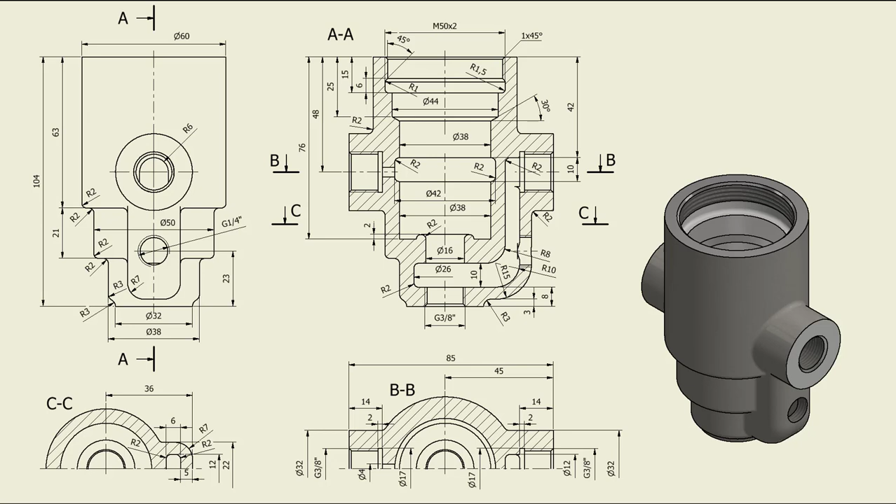Hi my friends, let's model the part number 96 brake regulator body from my collection of 100 parts.

The picture of this body is this, and it has an empty feature here. Let's see the drawing. You see this one, which is difficult because you must observe the other features around, but we can create it, of course. Let's model it.

The first volume is the main body with this contour. Here there is another step, 1, 2, 3, 4 steps. With this distance, this will be the center point at 48. So let's draw the contour.

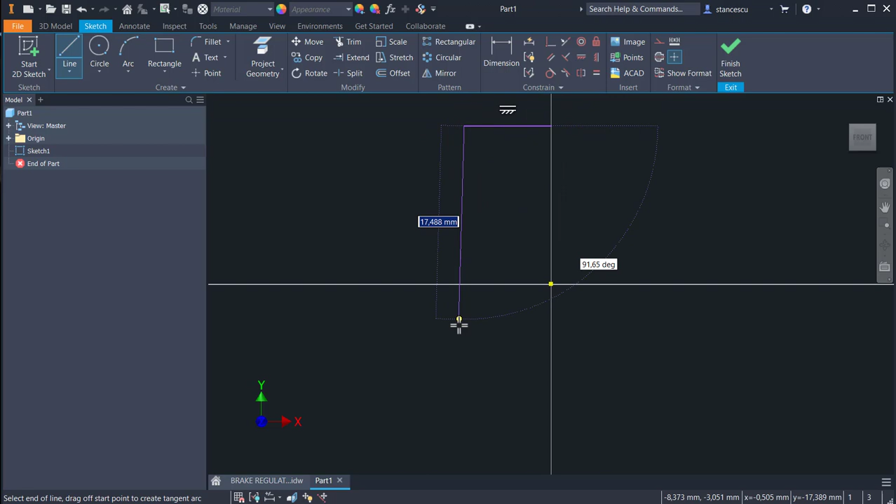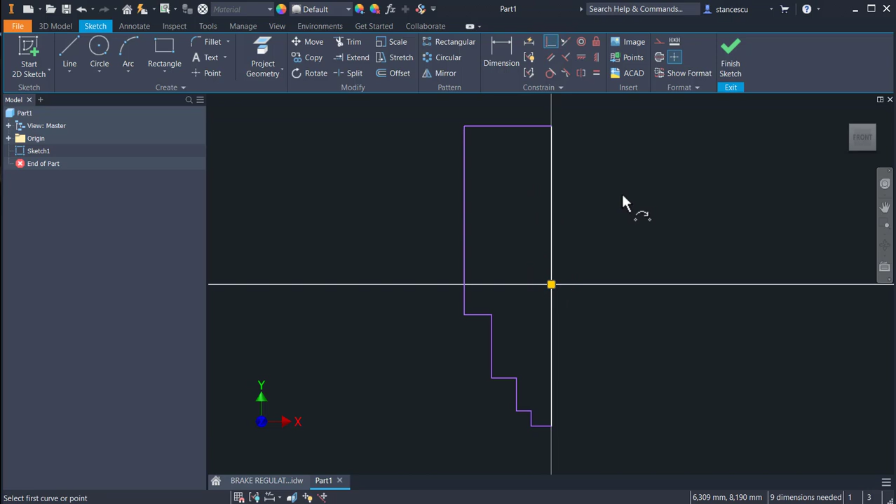This line contains the center point, and it is a center line. The height is 104 millimeters. This distance is 48, as I said. This is 63. You have dimensions in the drawing. 21. And this is 3.

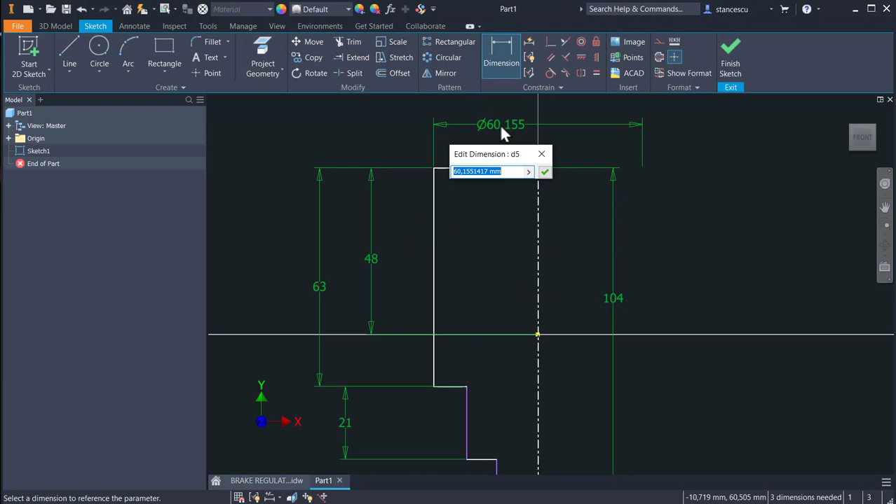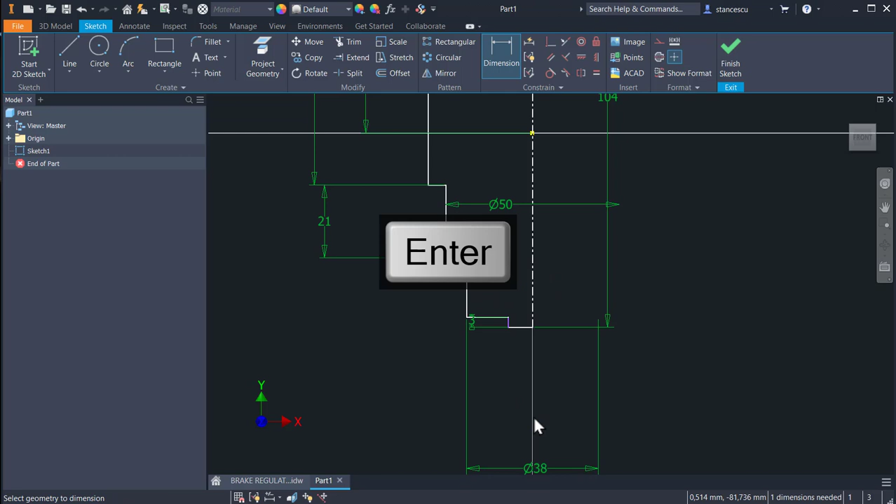Diameters are 60, 50, 38 and 32. 38, 32. Good. Finish sketch. Revolve. This is the first volume.

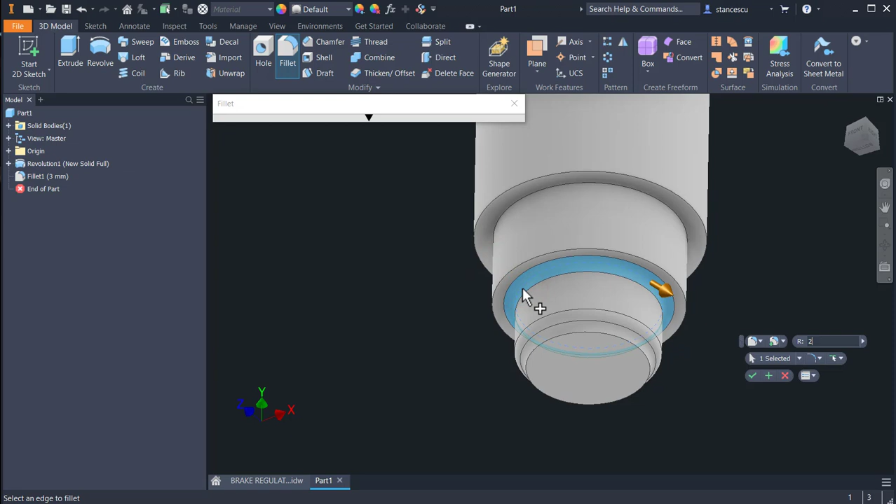Let's apply here a radius. You see that this is radius 3, and then radius 2 to have a right contour. 3 and also 3, then 2, all of them. Okay.

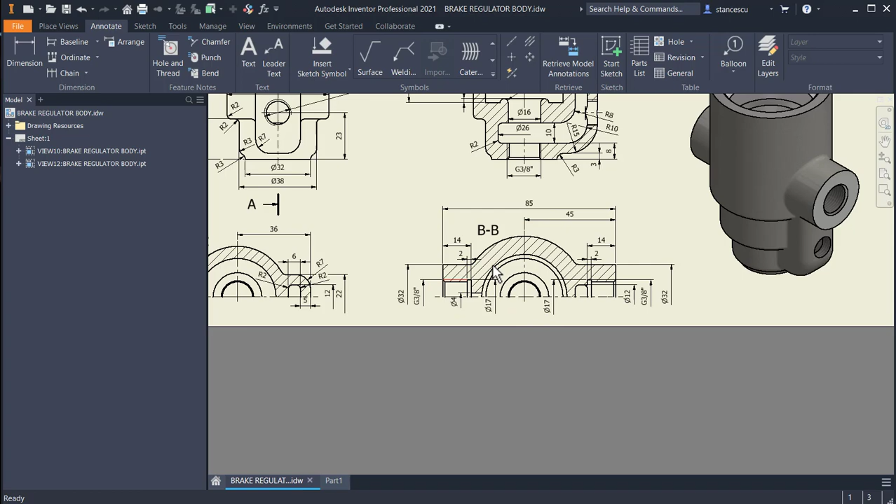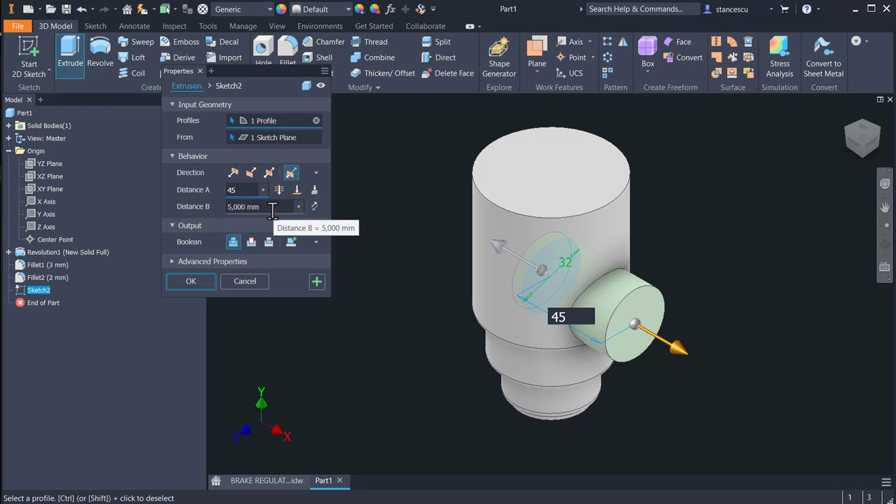Next is this perpendicular, the diameter of 32, 45 and 85. Let's create in this plane that volume, and then extruding a circle of 32. So F7, 32 in the center point, and then extrude asymmetrical. This 10 becomes 45 and the other 85 minus 45. Okay.

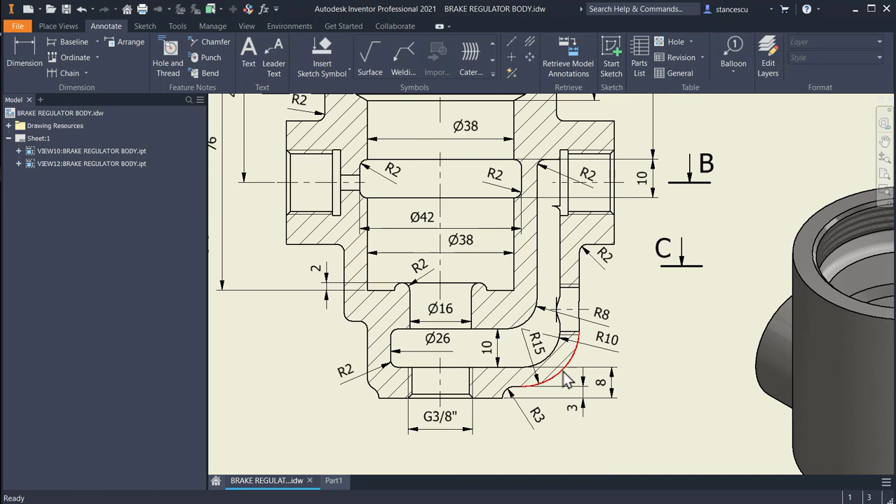Next is this extrusion. You see this one, which has a contour here. We start from the 3, radius 15, and another dimension, which is this one, 36, with the radius 7 all over this extrusion. After XY, the sketch F7 is very simple. One line, another one, an arc, horizontal and back.

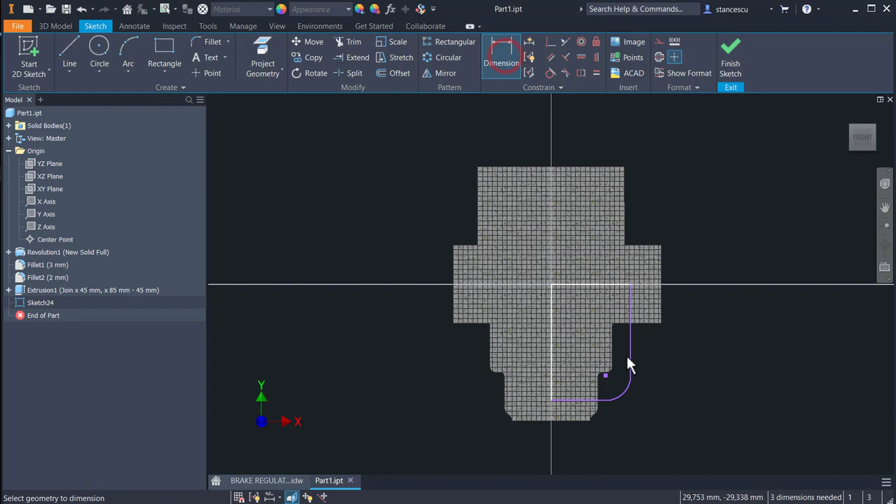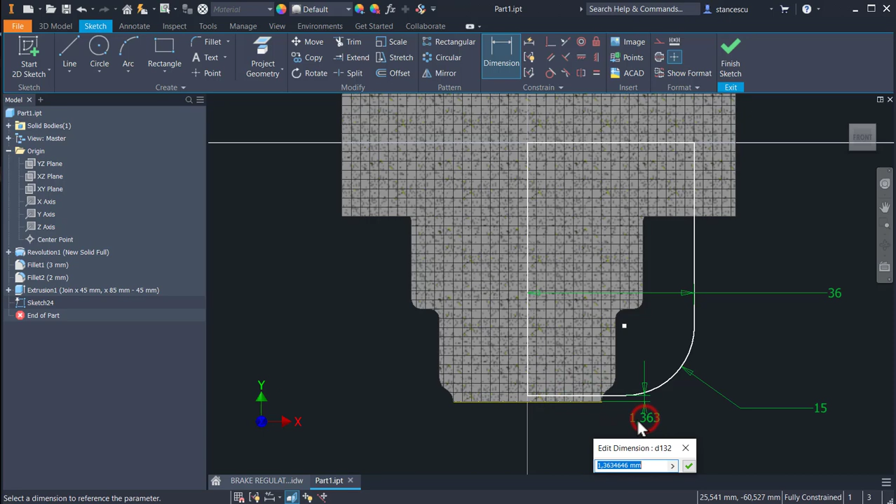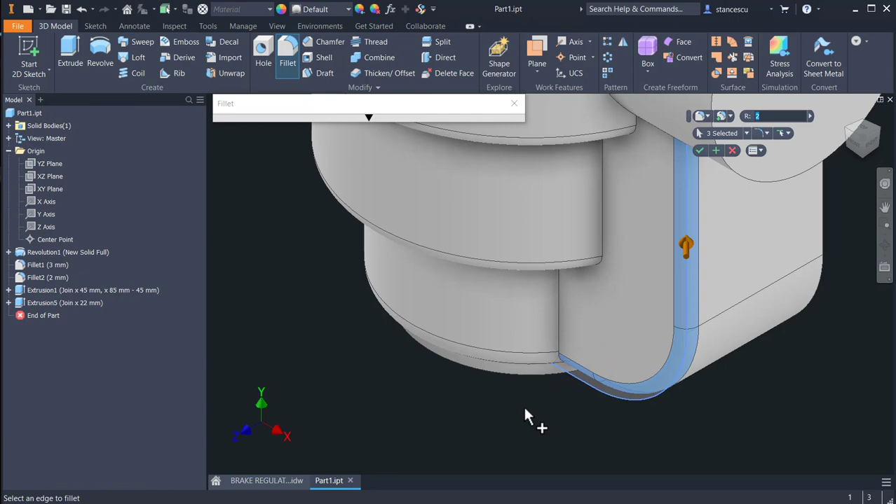Dimensions. This is 36, radius of 15, and distance, after I move a little up, the distance is 3 between these two. Finish sketch, extrude symmetrical on 22. Okay, now radius 7 on this edge and this edge.

Okay, very nice. The others are all 2 millimeters, as you can see here, here. So I select one of them and I apply 2 millimeters, not 7, to each of them. Complicated or not, but these are all. Okay, F6.

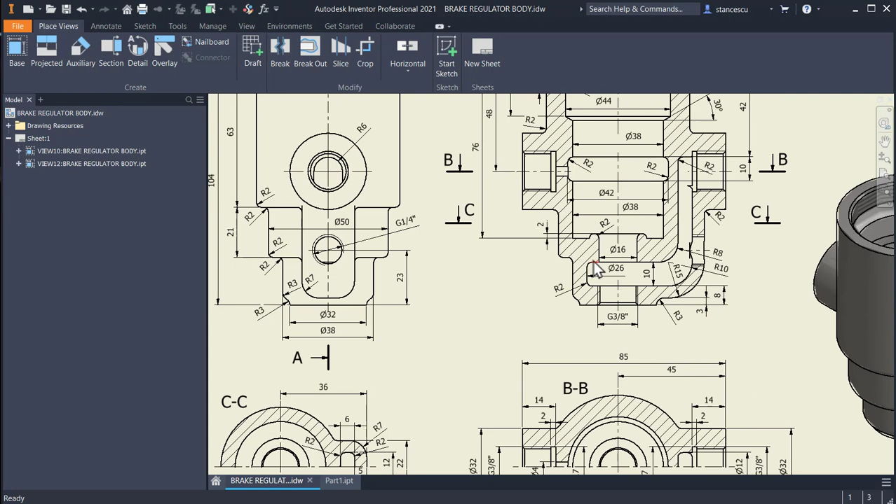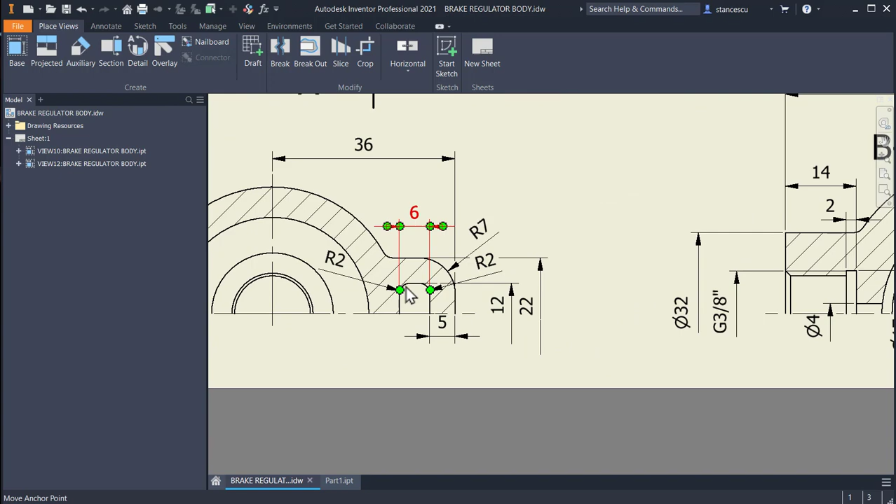Next we create a second body or solid object with this profile, where the first is a cylinder of 26, and then a channel here of 12, all of them rounded radius 2. Remember dimensions 6, also up to the center point. The center point is here, this intersection, radius 6, which places this line up at 6. Radius 10, radius 8.

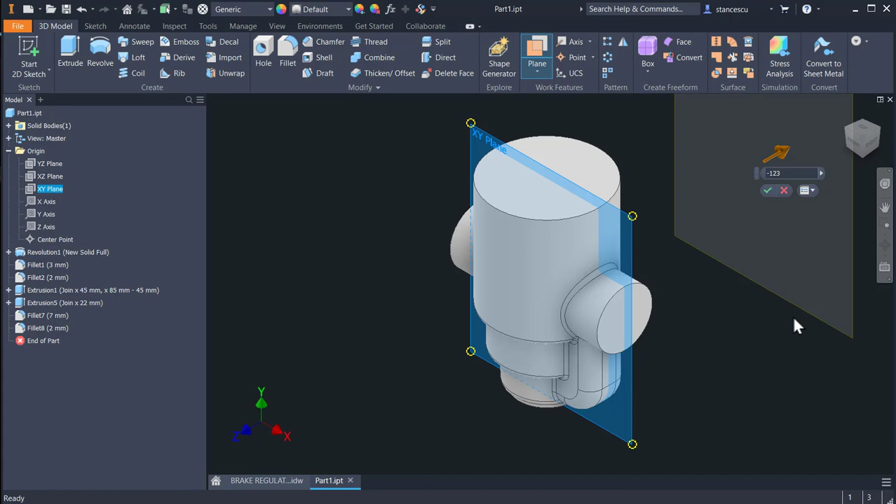This bottom position of that channel or cylinder is placed at 8 millimeters from 104, but minus 48 to measure from the center point. 104 minus 48 minus 8 is the base. Let's create this second body. It will be placed outside this main body, starting with a sketch placed at an arbitrary distance of minus, you saw the sign, of 123 millimeters. This is where we place the first sketch.

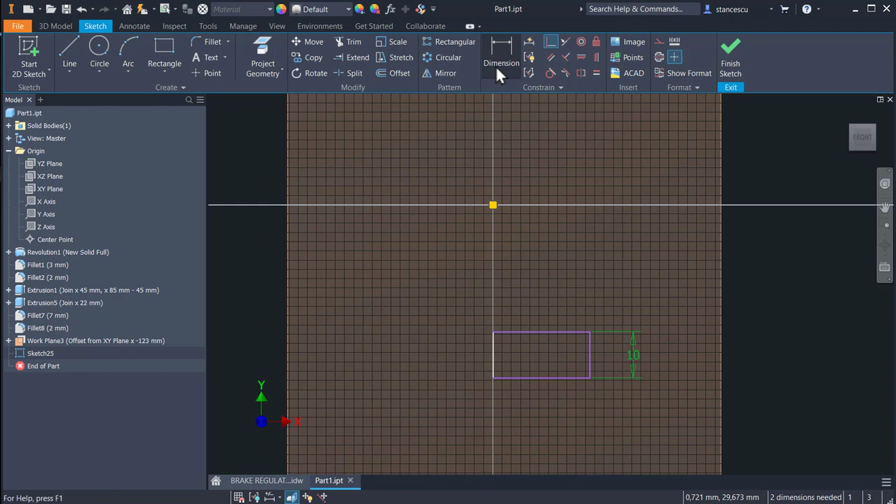F7, rectangle, tab 10 is the height of this rectangle. The left side is containing the center point. This is the center line, diameter of 26, as I said, 26, and at a distance of an expression 104 minus 48 minus 8. Finish sketch, revolve.

As a new solid, I select this option, and to be sure that this is different, I apply a property color red to all this new object.

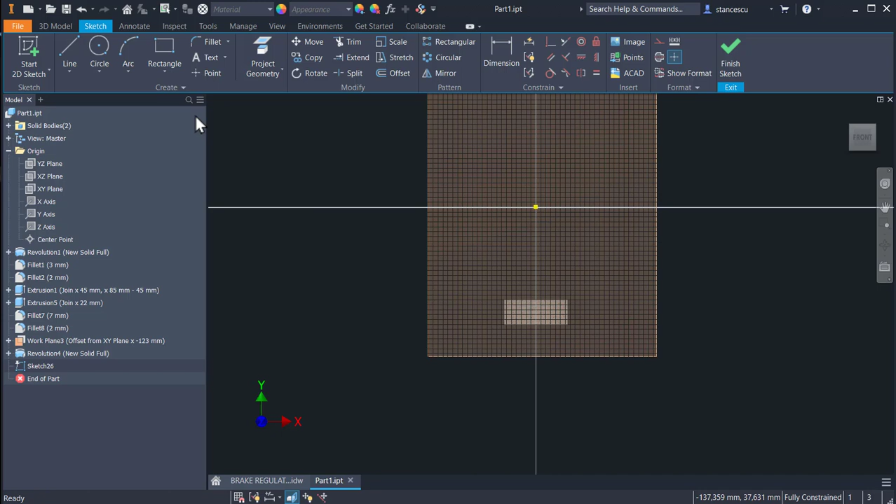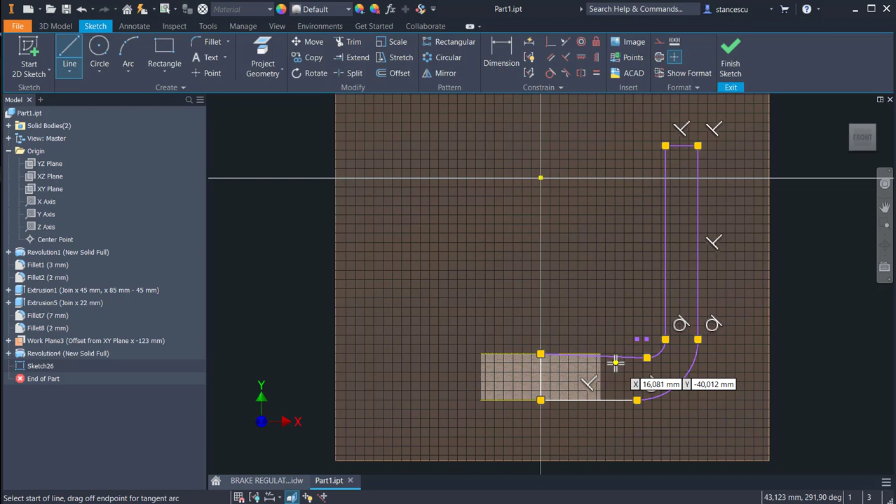Another sketch on the same plane, F7, is based on these two projected faces, and it starts with a line between these two centers, and then a contour up above with 6, width of 6. We'll place these dimensions, and then another arc, this one, and we finish here, but let me make this horizontal, this.

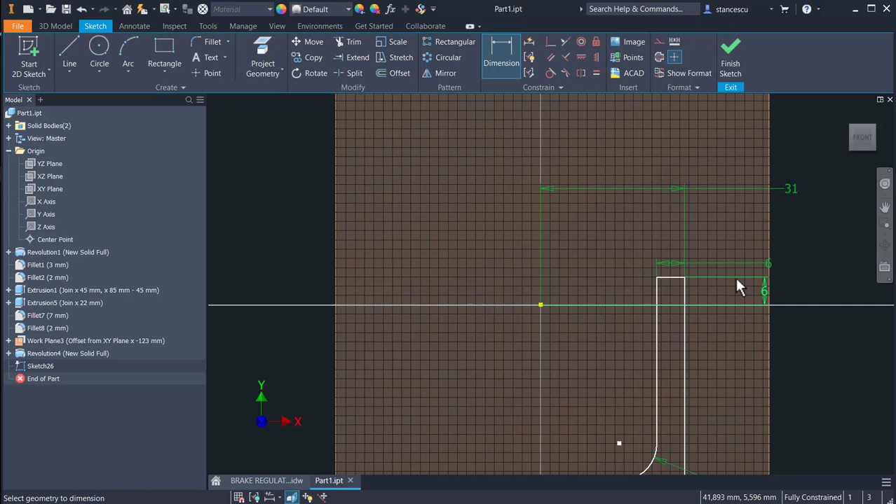Good. Dimensions are 6 for this, as I said, 6 above, radius 10, radius 8. This is not tangent. Let's apply tangency here, and the distance from the center of 36 minus 5. 36 minus 5. You have the drawing, you can consult it. Finish sketch.

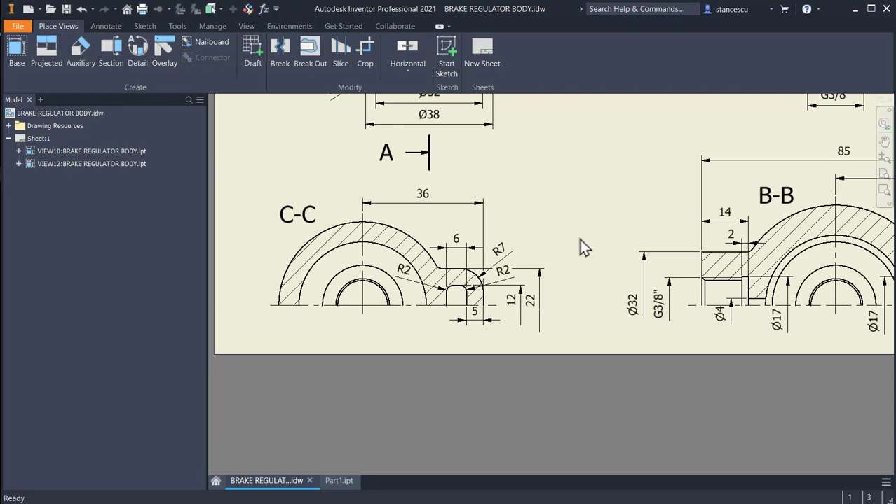This is this channel. Its dimension is 12, its width. Let's create an extrusion of this. You see a dotted line on this solid, which means that the new feature will be joined with this, not with the other.

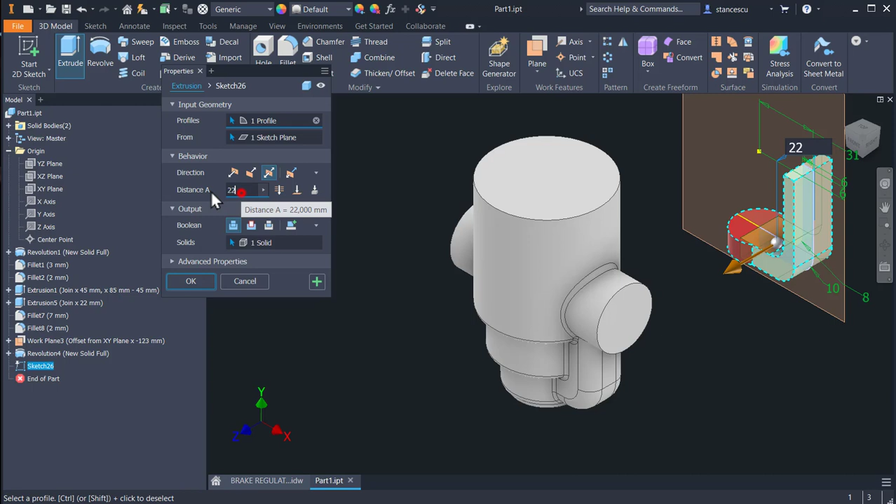The value is 12. Okay, and now we apply a fillet of 6 to have a rounded end. There is a dimension, we know 6 here inside the channel, and as you can see, radius of 2 all over.

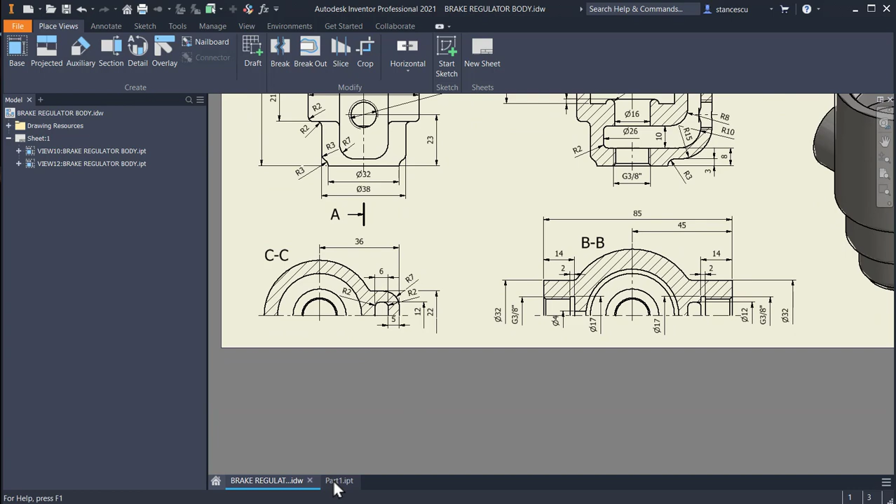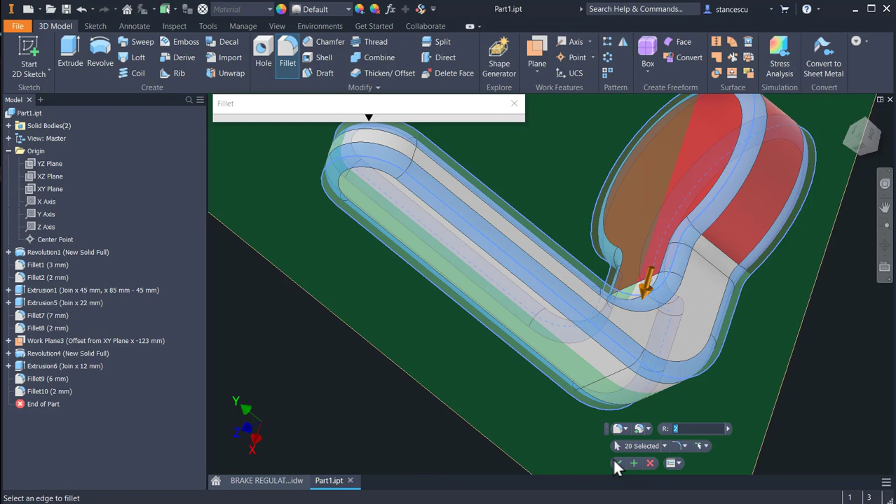Yes, radius of 2, but we start with one edge, radius of 2, and the other, plus all the others on both sides. Okay, F6.

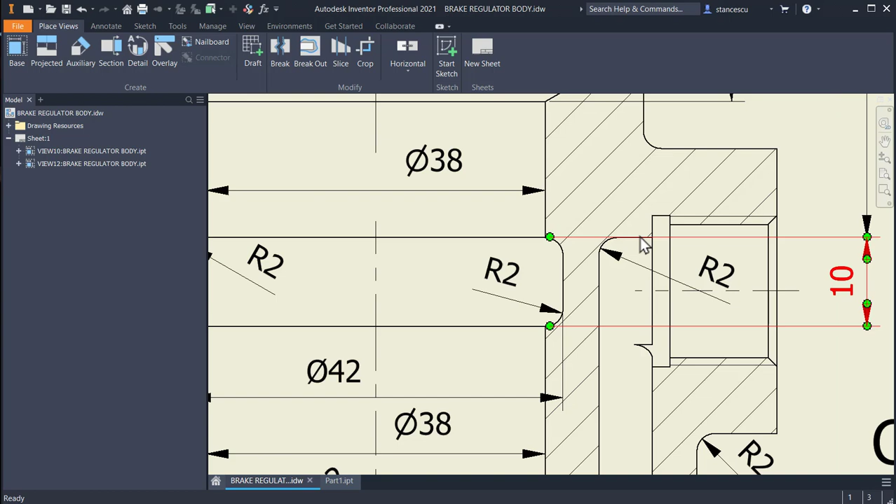Next is based on an observation. You see here a line tangent to this radius 2. Now we created a rounded end here, but you can see that this end is here, not here. So we have to create with this diameter a continuation of the hole to have this presentation.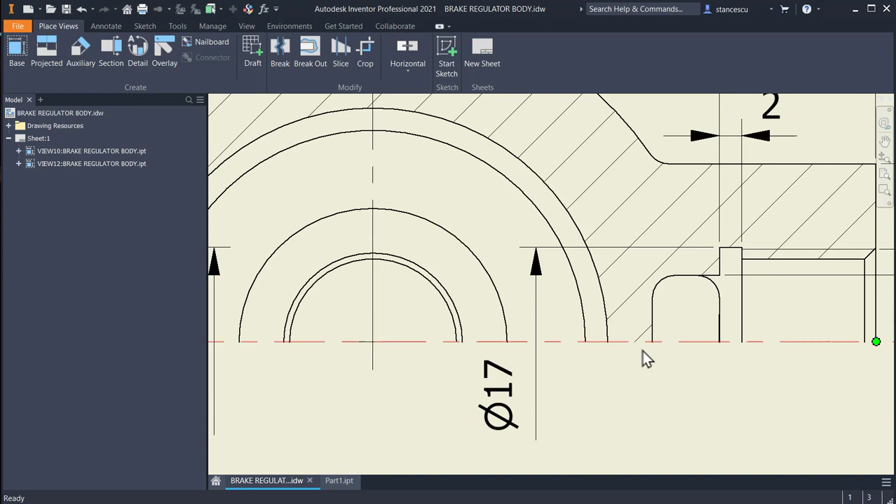What is the dimension of this clearance? The dimension is a diameter of 17. This is why we add to the model an extrusion with this diameter. See what I do. I select this face, I create a circle with a diameter of 17,

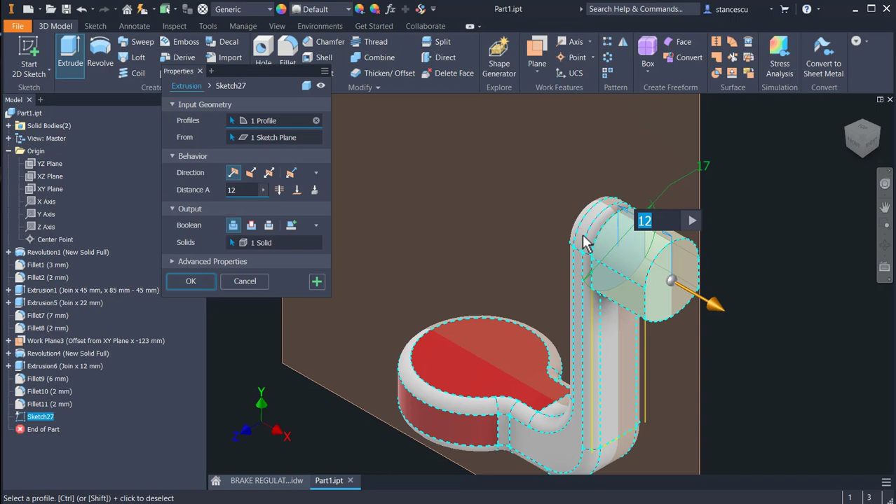and then I project 1, 2, 3 lines, and I make these other lines construction lines. I trim the external arc, and then I create an extrusion of the selected area, but not outside because it creates a gap here, but to the part. Yes, with join, not cut.

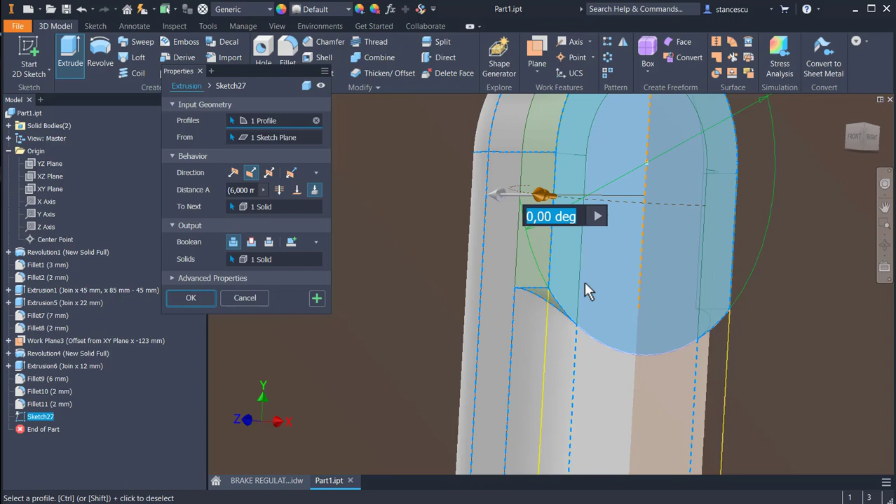This is the way I create here another end. Yes, and I'll have this contour inside with the width of 12, because this is 12. You will understand after I finish. Okay, F6.

This plane is no longer necessary. If you want to have all of this with that color, you can select the second solid and apply properties red, not as part, red. Okay, and this solid is now all red.

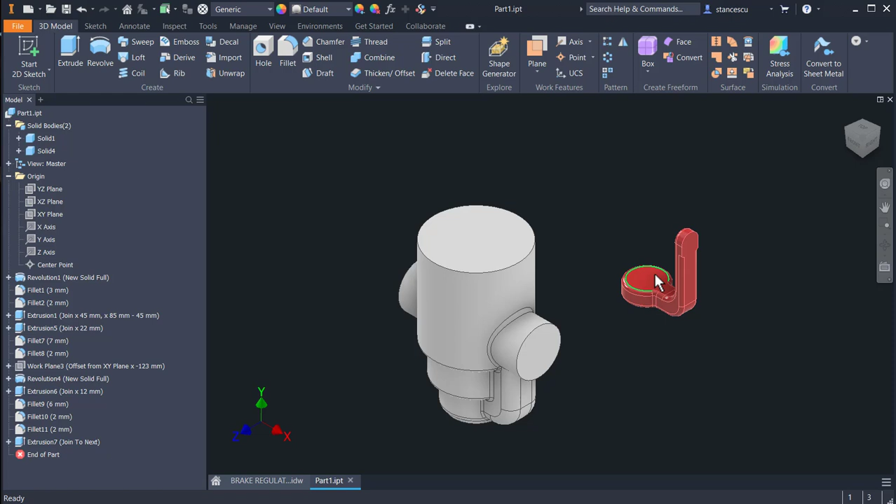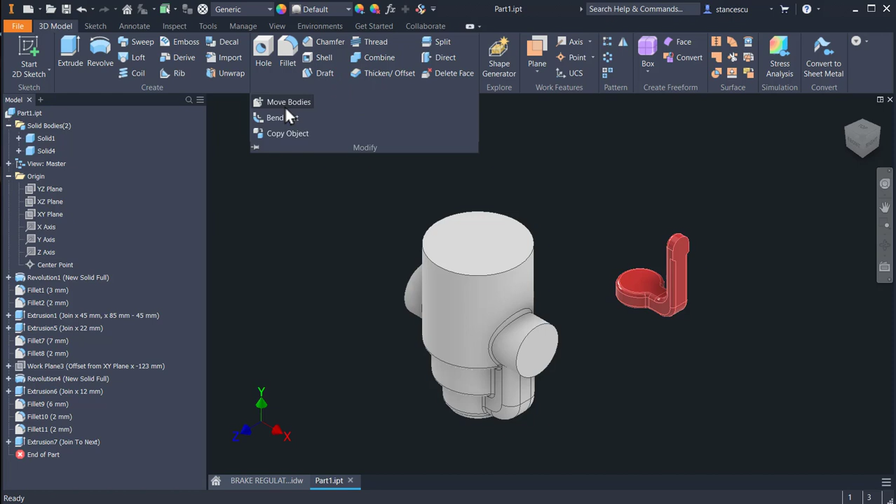We want to place this core back inside the main body and to subtract this from this. Let's do these operations, very sensitive and nice. Move bodies. What body? This one, which by default is moved on the x-axis, and we want to move it on the z-axis with 1, 2, 3, an arbitrary distance.

Now the second body will be here. We want it inside. Then on x we place 0. The body is inside. Yes? Look at it. Okay. Now it is really inside.

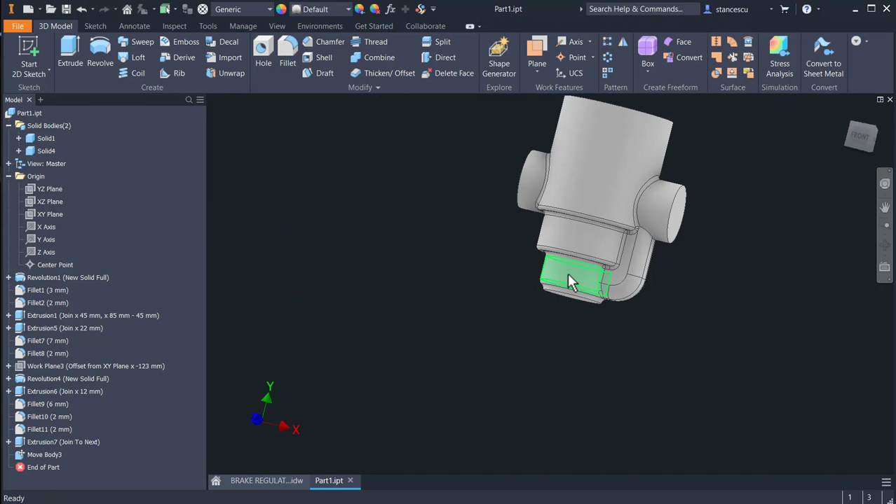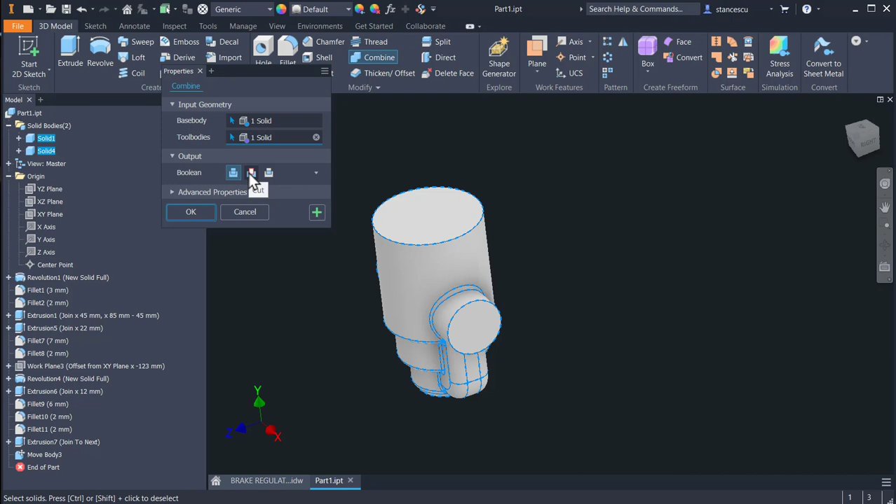We apply combine to subtract from this base body, the main body, the tool body from inside by using the Boolean operation cut. Okay, you don't see now that something changed, but you'll see very soon.

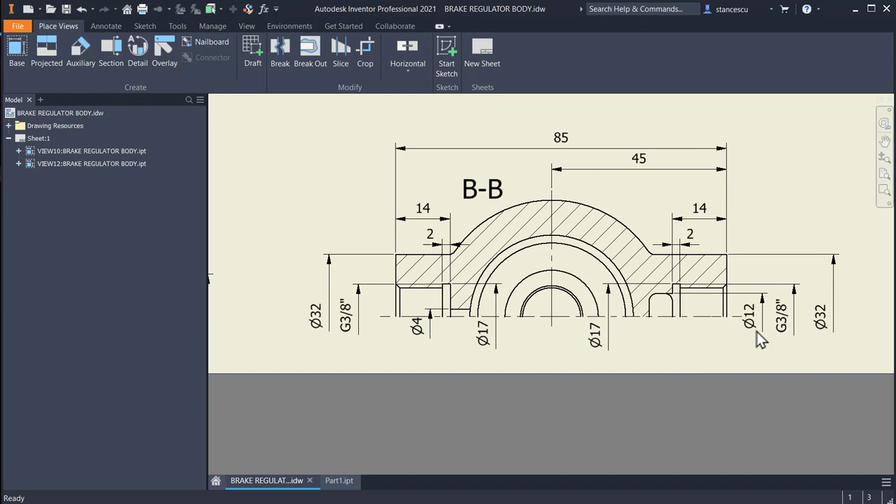To see inside, we'll create these holes. They are identical if you see, G 3/8 inch, G 3/8 inch, 14, 14, 2, 2. This means that we can apply one centered on this boss and then one identical on the other boss.

Hole, this face, this center, threaded. Oh, all dimensions are here. I searched for this. If you are not sure and you select another one, you have to change it to find the proper one.

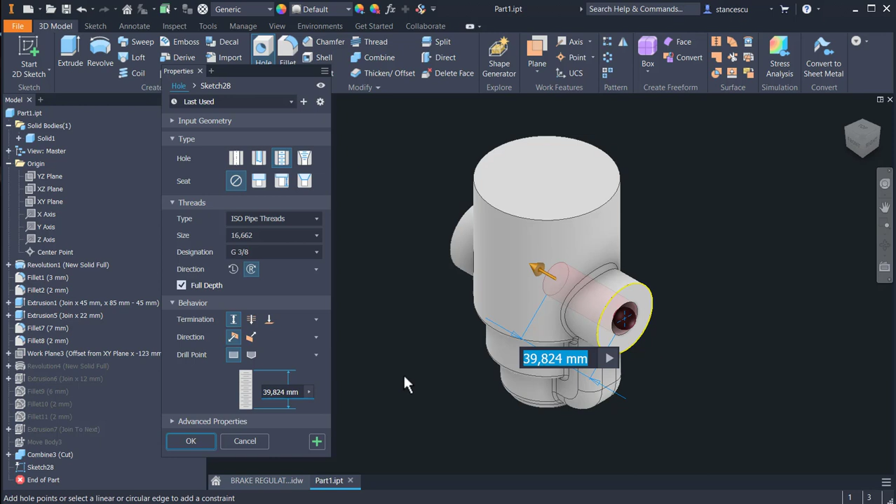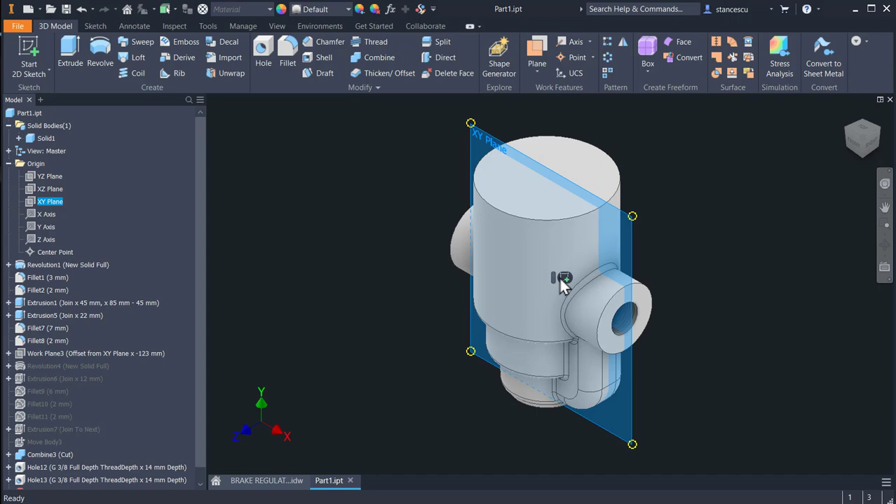The end is flat, not angled. The depth is 14, and the others are okay. Plus the same definition on this face, this center, okay. Now we go inside because we have to add some other features.

You see, this is okay. Yes, you see here that extrusion on the core. There are other red, 2, 3 red faces. We can change this by selecting this tool, clear, select all, which will change it from the default, and editing.

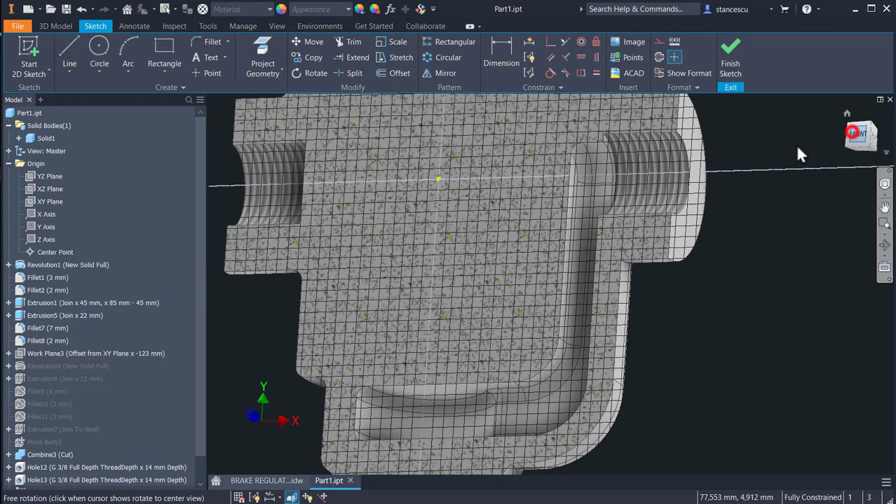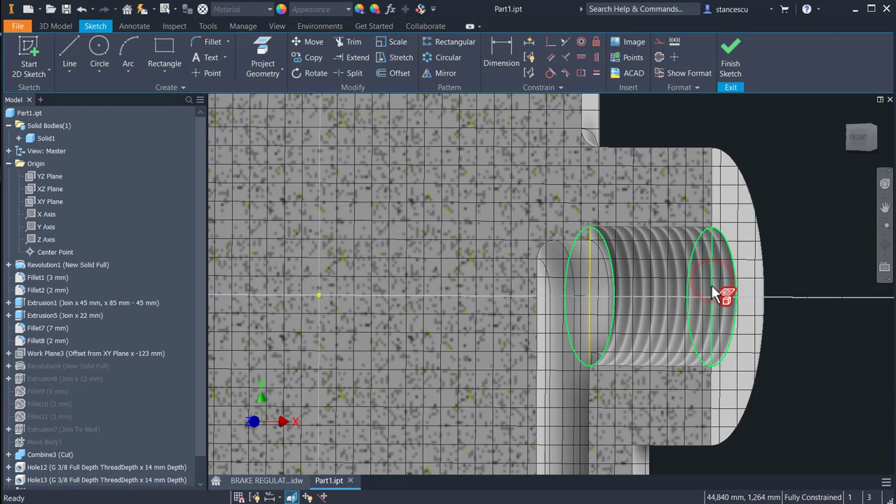We create now the clearances by projecting all this, this circle, but not here, here, these two, yes, these are not interesting. So I eliminate them.

Good. Having this, I create a rectangle starting from here and going inside. This is 2, and the diameter, if I make this center line, the diameter is 17.

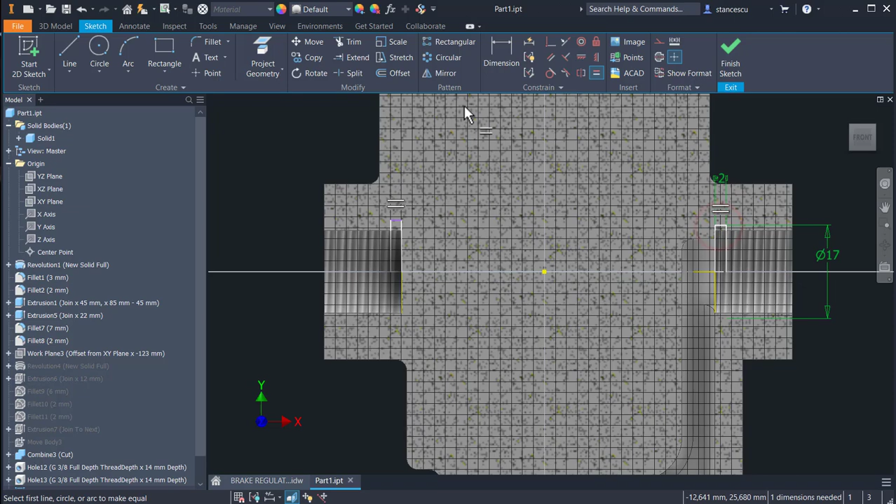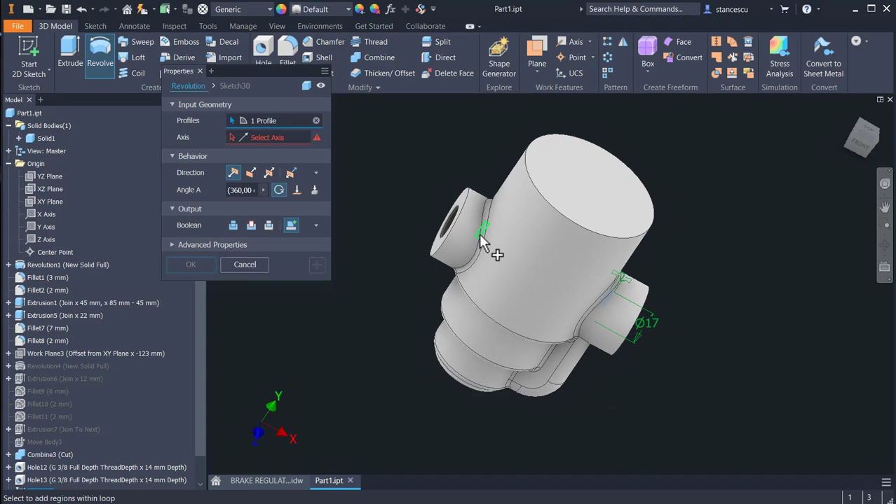The same feature I create from this point to here. Equal are these two, and on the same line or collinear are these two. Yes, one center line is enough. To do what? To apply revolve. Revolve of this contour and this contour about the unique axis inside, this one, with cut.

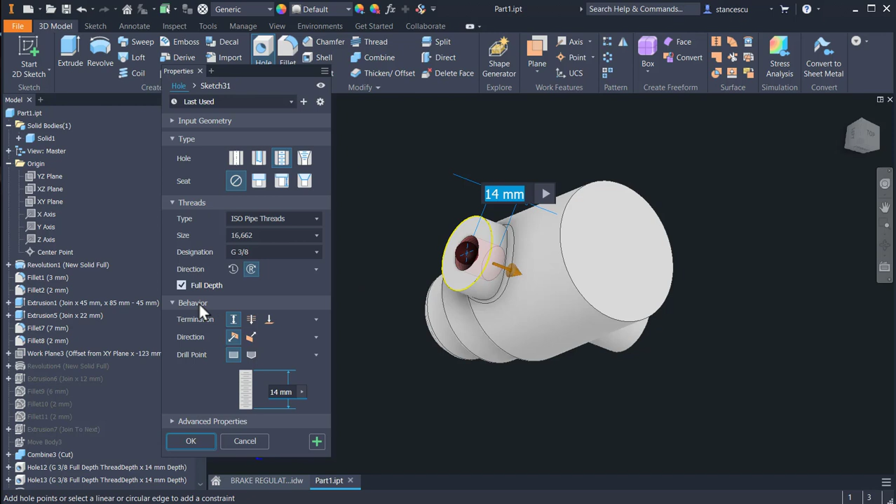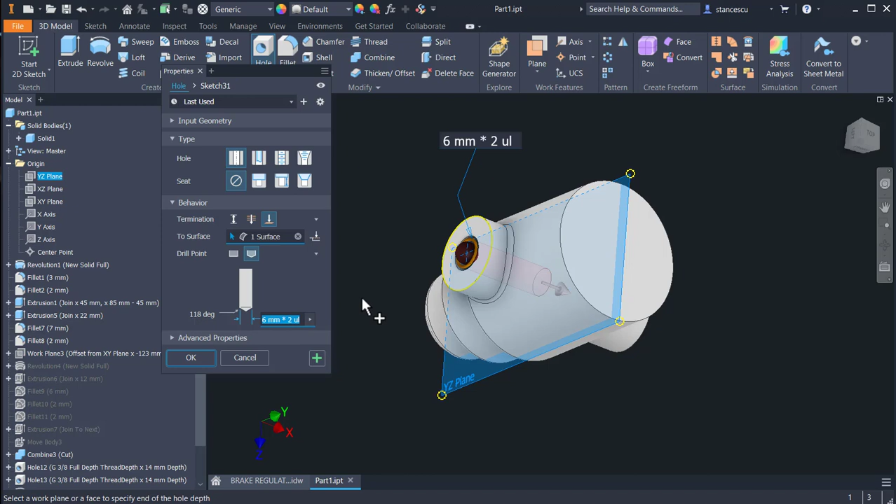Okay. Now we see inside, everything is okay. There is another hole, this one, which is with diameter of 4, which ends to this plane. Let's place it. Finish this axis. Hole, this face, this center, simple hole, not threaded, and normal and angled, to what? To this plane, with a diameter of 4. Okay.

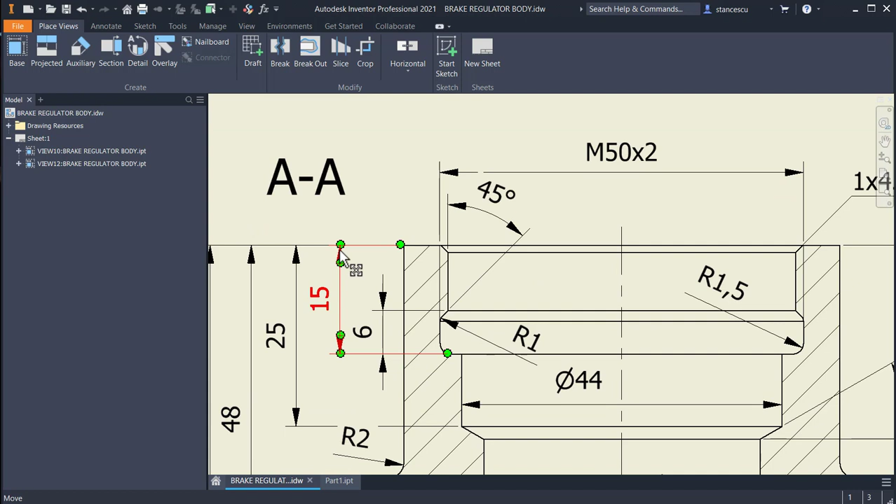Another hole is this one, which is presented here, metric 50 with a pitch of 2 and the depth of 15. Hole, face, center, threaded, metric 50. This is 50. This is the normal pitch. We select a thinner thread with the pitch 2, and the depth of 15, flat end, not conical or angle.

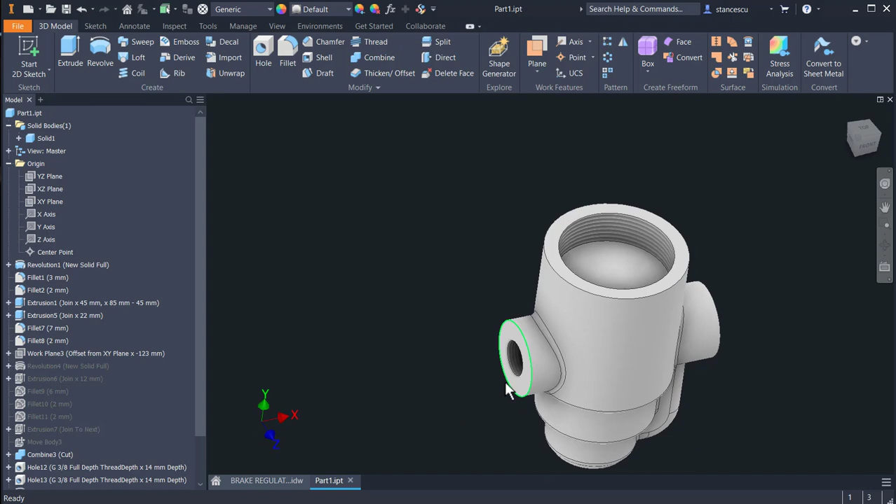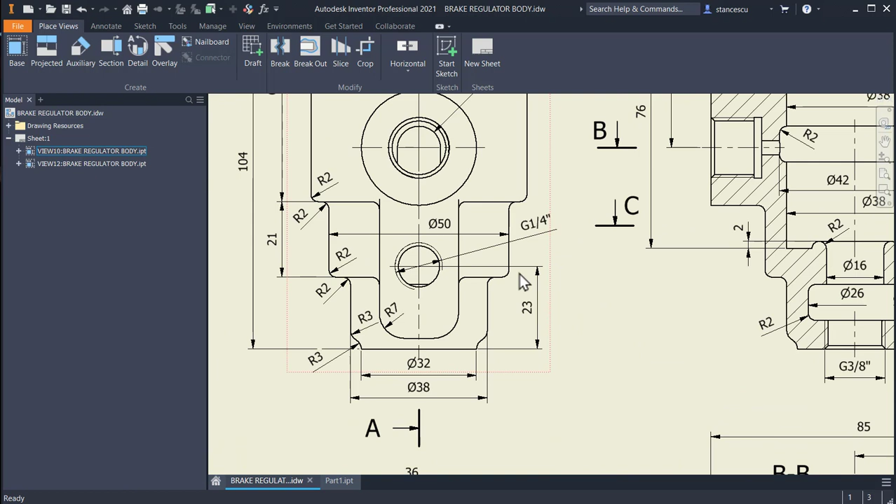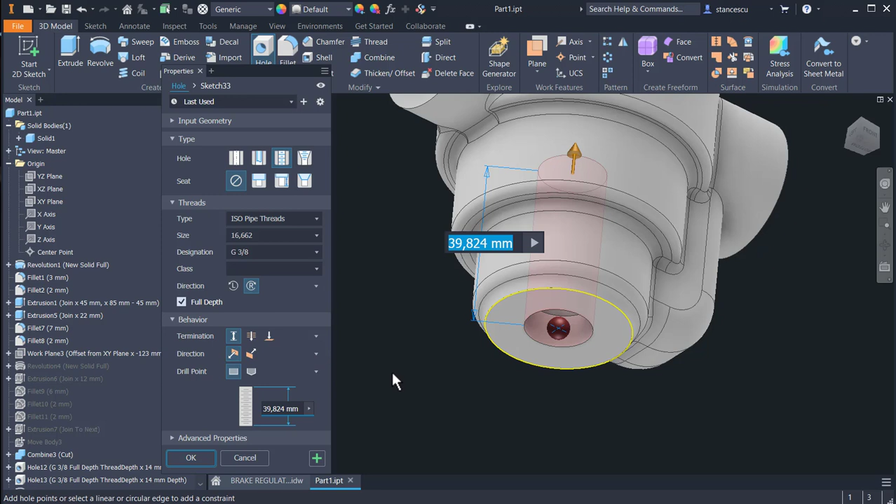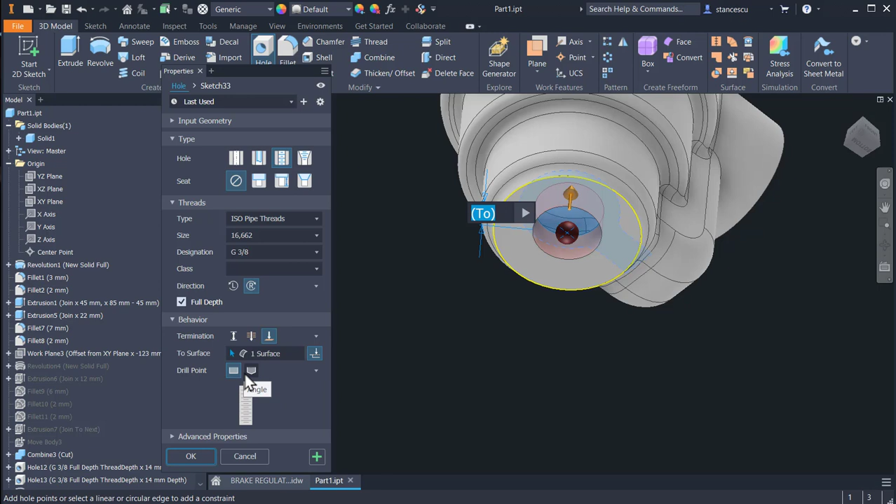Okay, this is the situation. Other holes, one is here 3/8 like the others, and another one here which is 1/4 of inch, also for pipe. This is placed at 23, the other is center. Hole, this face, this center, ISO pipe threads, diameter of, we know now, 16 is 3/8, and to, select the surface, this surface. Yes, you can see inside the core, the empty core. It's not important what end we choose, because there is enough room inside.

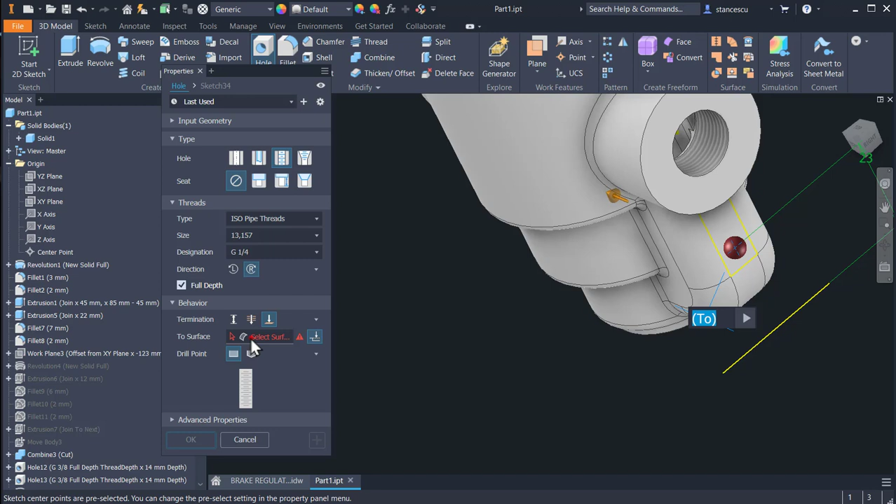The other one is placed in a sketch with a point. The point is on the vertical with the center point and a distance of 23. Finish sketch. Hole, diameter of 13 is 1/4 of inch, and To is to this face. Yes, okay, very good. You can see everything inside.

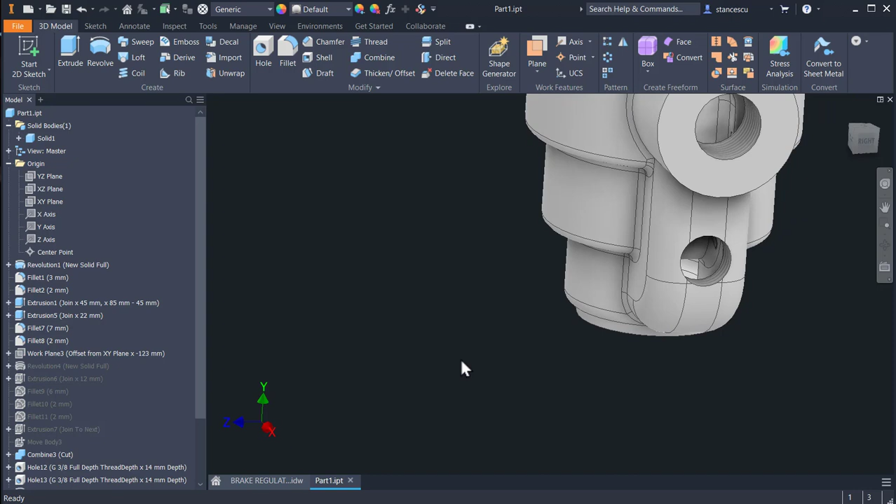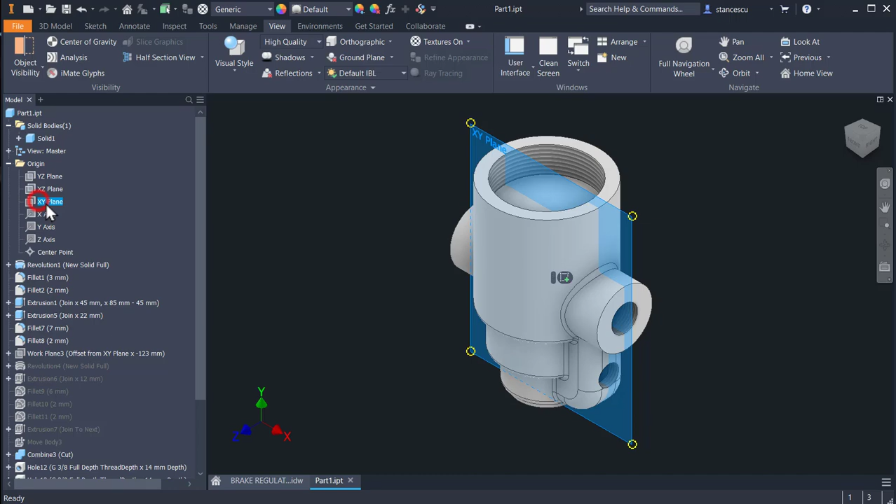What else? What else is the revolving hollow inside? As you can see, there is a chamfer, then a radius in a clearance 45, a radius 1.5, diameter 44, angle of 30, 38, and so on. Let's create a sketch in the plane XY. I prefer to place it outside and then to bring it where it belongs. Yes, to be clear, firstly I project as construction 1, 2, 3 lines.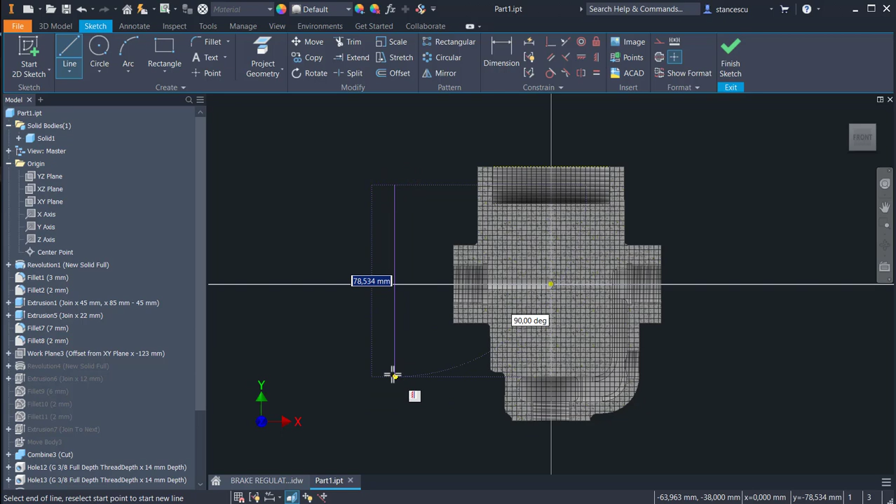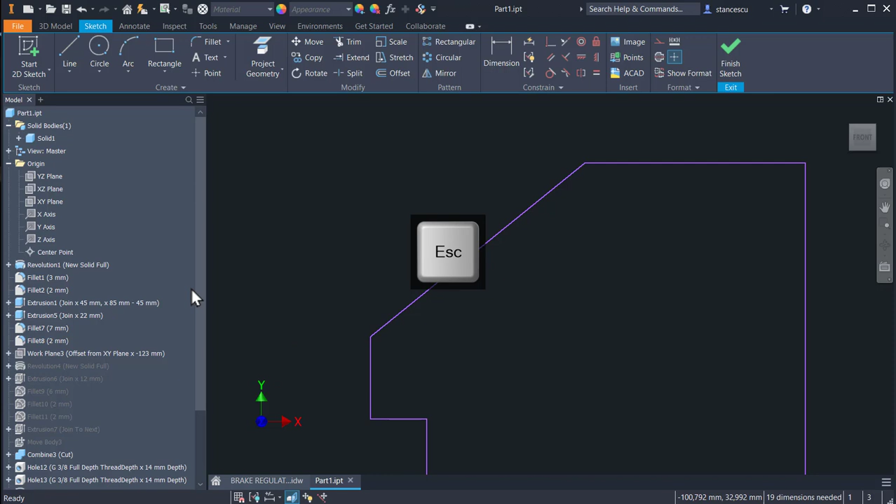And then I create that contour starting from about here to the bottom line, and then we continue with the other lines and arcs as well. Another line, another arc, up, arc, then angle, horizontal, vertical, and line, end. Good. Here is a radius of 1, fillet 1, and the other is 1.5. The angle is 45.

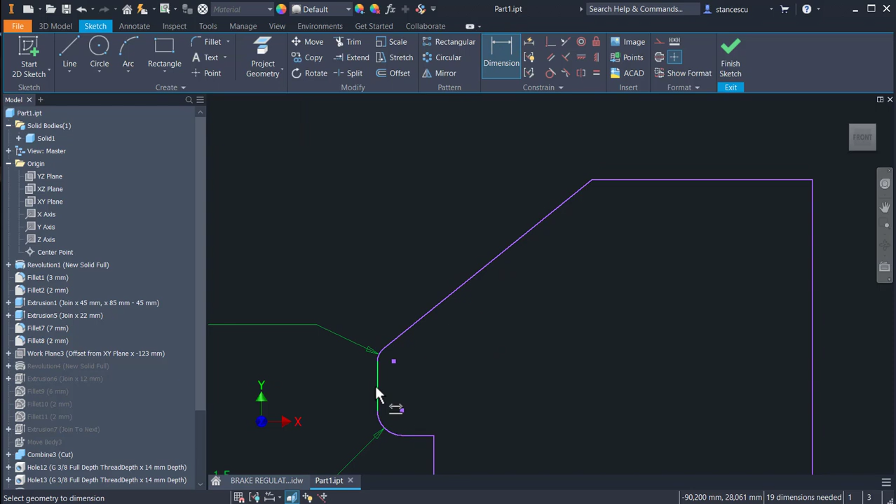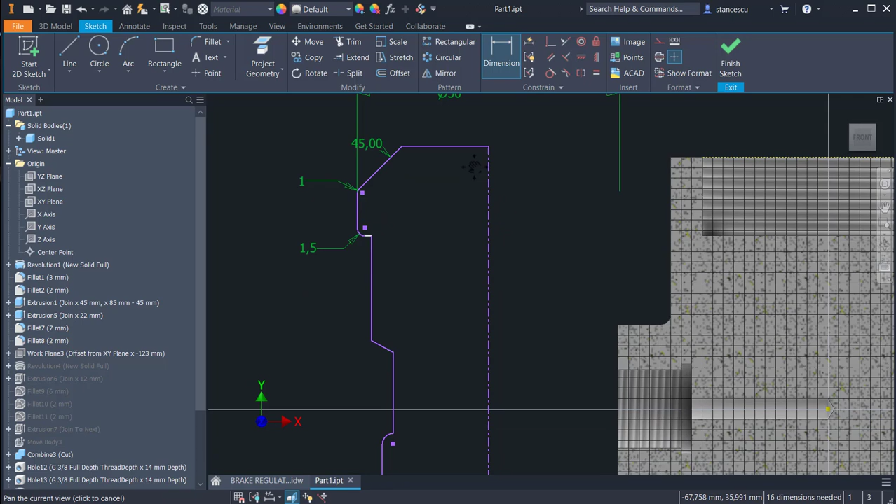We move this a little more up to have this level for this line. Yes. Okay. This contains this point. This line is the center line, and now diameter 50 here, the external diameter of the thread. Then we measure from up. Let me place here. Dimension from up to this point is 25. The angle here is 30.

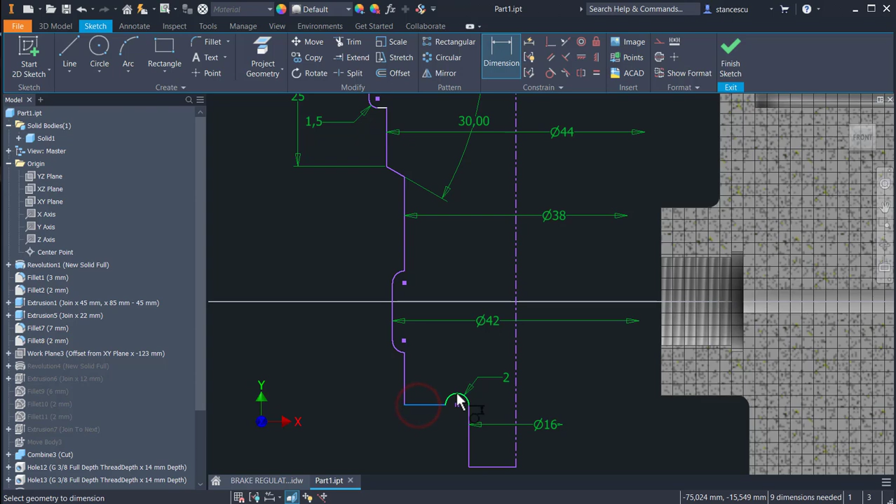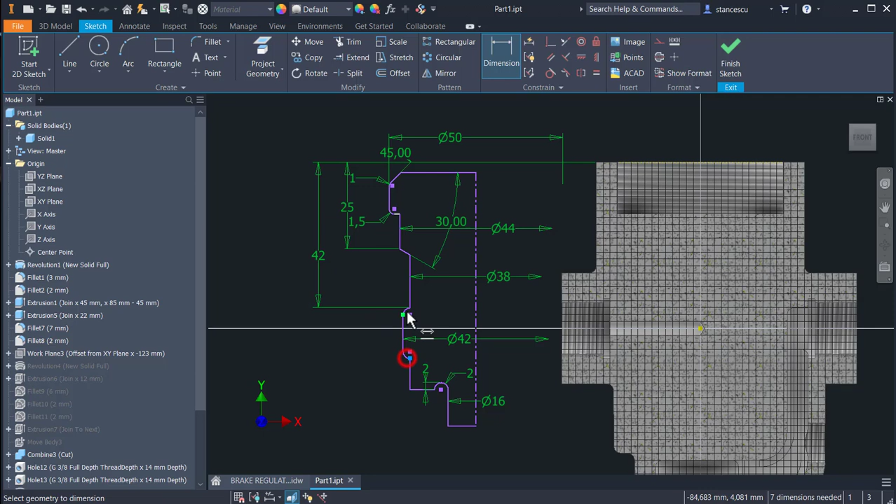Diameter of 44. Diameter of 38. As you can see, this is maintained on the same vertical. This is 42. This is also 38. 16. Radius of 2. Distance from here to up also 2. Okay. And on vertical from up to here is 42. This is 10. And this is 76.

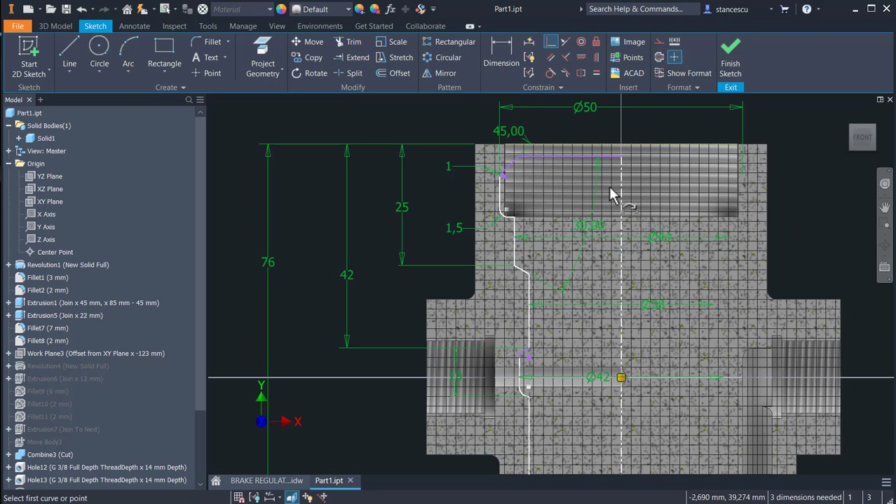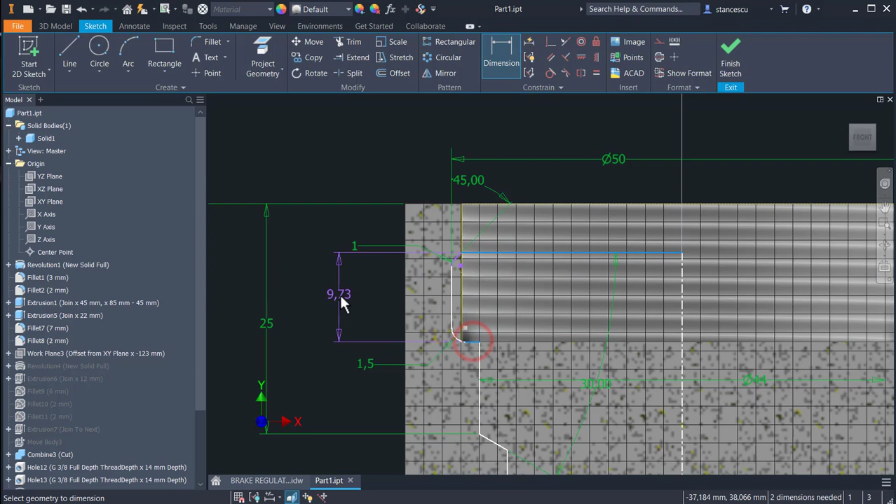But this must be lower to be collinear with this bottom line. Okay. Now, because I applied these two collinearities, I move the axis in the center point, and we have this almost done. I place this point on the vertical line, which is the internal diameter, but let me project this vertical, and then I make this modification to place the point here. Now I can place the dimension of 6, because I didn't know where this line is. Good. What about this? Oh, the radius is 2. And they are by default equal in this combination, due to this diameter and radius 2.

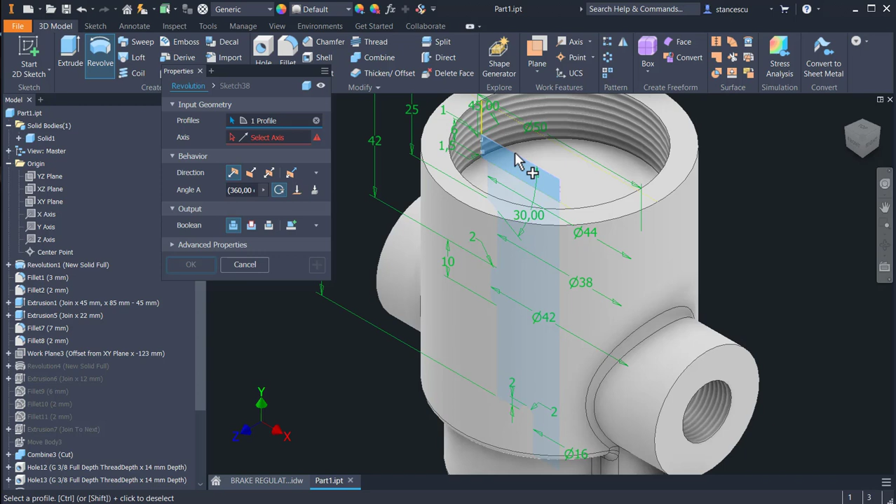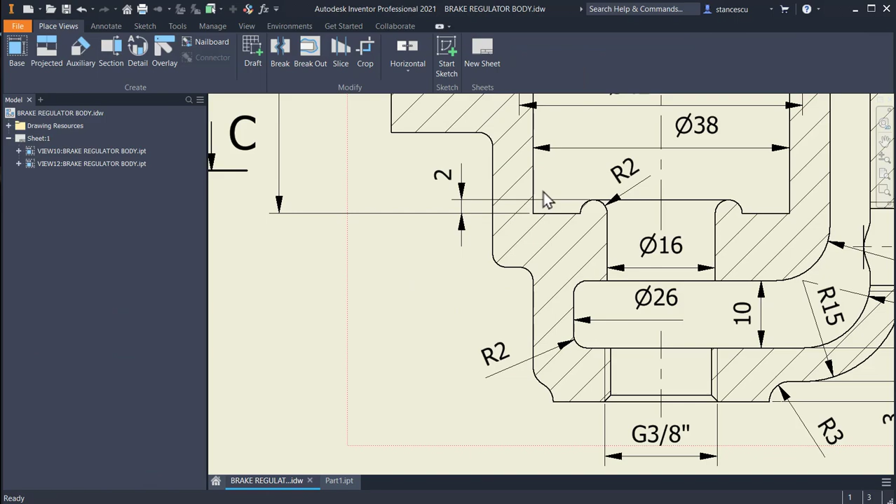Finish sketch, revolve, this is the profile, all of it, and the axis is known. Cut, subtract. This is the part. There is a chamfer up here of 1 millimeter, and the rest is okay, absolutely. Chamfer of 1, okay.

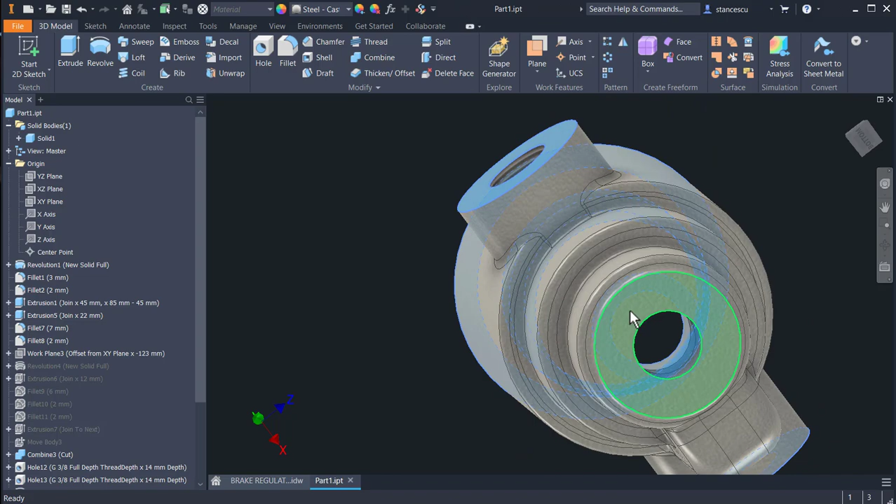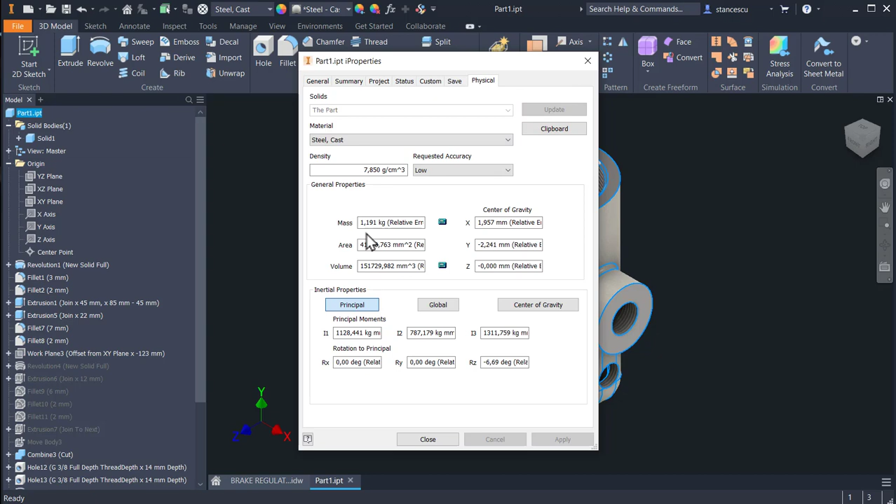Assign material, steel cast, the general aspect steel cast, and then some faces to be polished. And the thread chamfer. Yes, and also this, steel polished. Data. iProperties, physical, update: 1.2 kilograms. That's all for today.